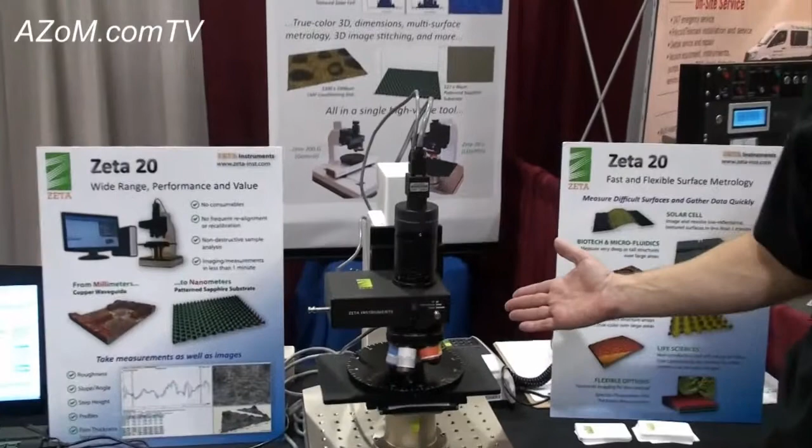Today I'm speaking to Ben Garland from Zeta Instruments, and he's going to tell us about their Zeta 20 optical profilometer. Great, thanks Cameron. This is our Zeta instrument. This is one of several series that we have. It's an optical profiler. Essentially it is a microscope system, but in addition to that it actually builds up 3D images so that we can measure X and Y dimensions. In addition to that, Z dimensions, so we can measure heights in terms of step heights, angles, and also roughness.

On the system we have an optical base plate in which one can put their own sample holder or stage. This is one of our standard stages, which is an XY manual stage with a rotation capability on the top. We have our standard objectives, which cover a range of 5x up to 100x. We have our technology that allows us to enhance the image and the resolution in the Z direction over that of a standard microscope system.

Our camera coupler combinations are very adjustable and user changeable to adjust to particular sampling needs by the customer. This is a mechanical drive in which we actually take image slices which are based on the full field of view of the current camera coupler to the sample. We use high brightness LED for illumination of the actual sample, so the color that we get back is the reflected light of the sample coming to the system, and then we take those slices in the Z direction to build up a 2D or infinite focus composite image, and then we have the 3D information.

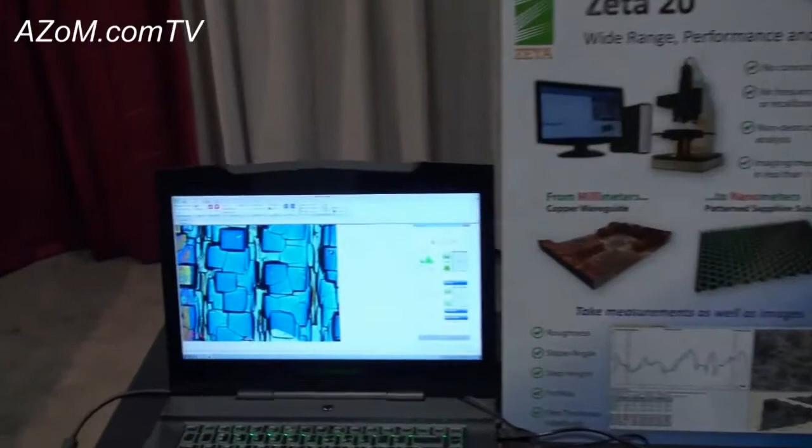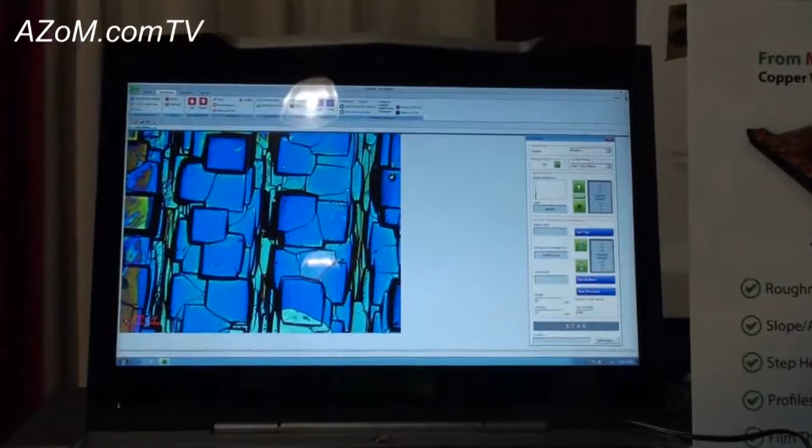To actually collect the data, it's very straightforward. If I walk over to the system, this is currently a semiconductor material, so this is silicon that's been etched. It has features, it also has some AR coatings and a variety of other films present. This is a nice sample to illustrate the technology. This is using different magnification lenses. One can actually see the effect in the field of view, but more importantly, the depth of focus. And that changes with the numerical aperture of the actual objective that's being used.

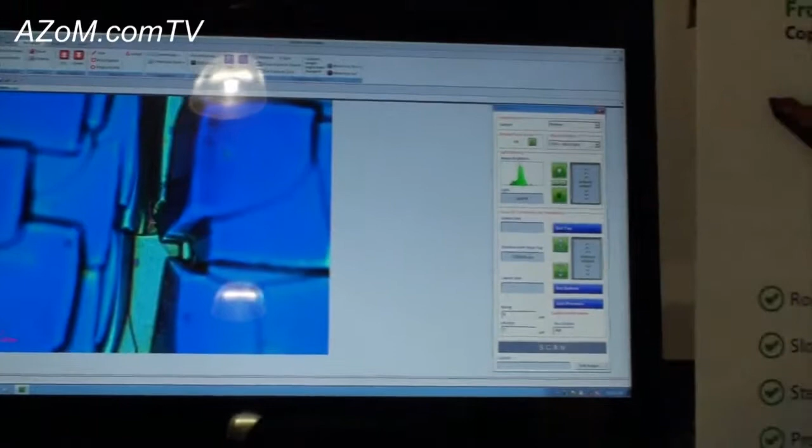If I go to even higher magnification, one can easily see, as I adjust the focus, there are many planes, or there's a huge depth of focus over the sample Z range. What I'm going to do is show you how we can collect this image in less than a minute and build up the 3D. Typically we adjust our illumination control, which is done here, or I can hit auto. The next step is to set the ranges, but what I'll do is actually turn on one of our proprietary capabilities which allows us to enhance this, and that is our focus assist.

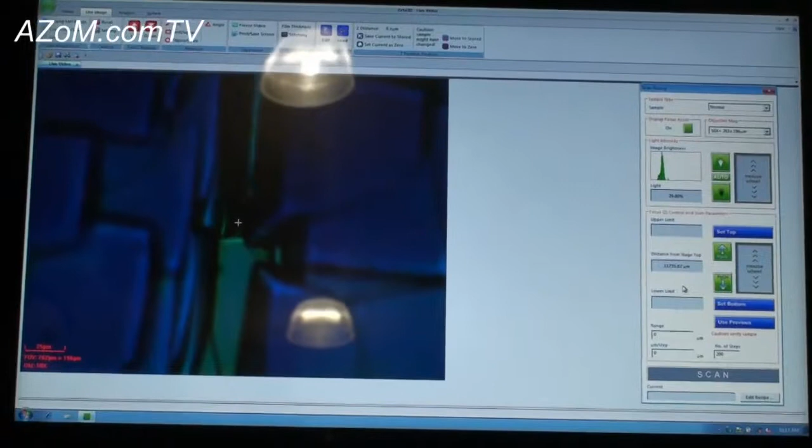It allows me to easily see which plane is in focus, so the region in the center is actually our highest point. To set the Z range, I want to scan from the top through the bottom, so I'll simply set top, and then I'll scan to the lowest point. Might actually give us a little more intensity for the contrast, and then scan to the lowest features, set bottom, maybe increase this a bit.

So we're going to scan a range of roughly 14 microns, and then based on the 200 slices that I currently have set, our resolution is going to be 70 nanometers per step. What I do is simply hit scan. At any point I can actually hit escape in the data collect if I really didn't want to run that particular spot.

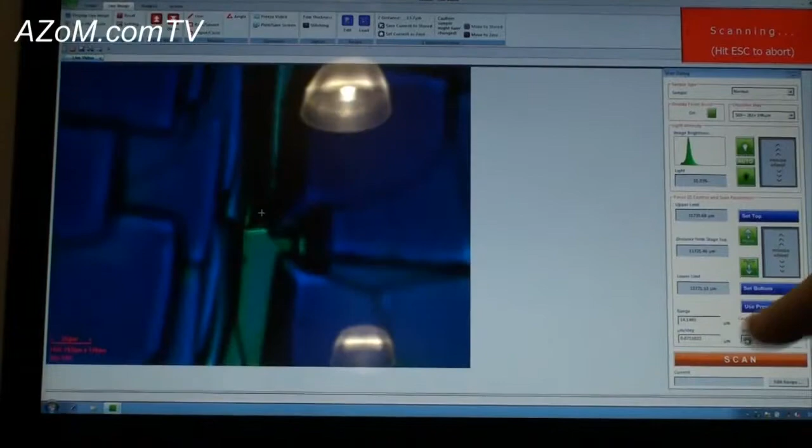You can actually see the image slice that we're taking on the sample. As we move the stage in the Z direction, we take that full field of view image at each location. At the end, we'll have the results, which will give me a profile across on the upper left. I'll have the 2D infinite focus image here, a 3D image located here, and the actual numeric values associated based on the cursors.

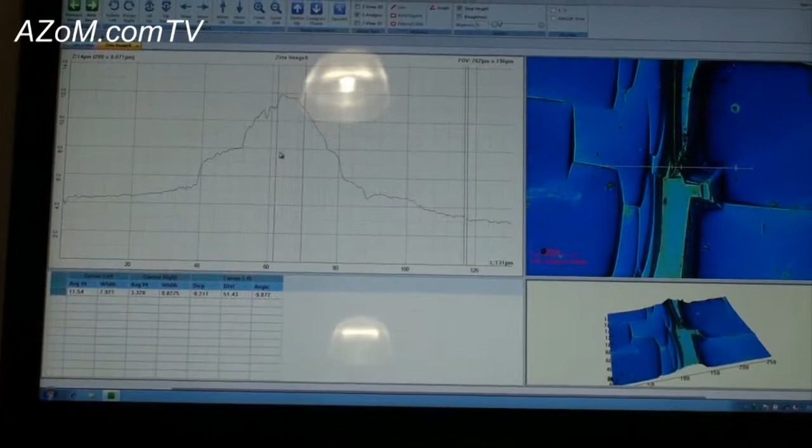Just like that, we have our image. I can now in the software very easily come over and measure steps. So for example, depending on where I put this particular cursor, I can look at step heights by taking averages or use markers and measure individuals. You can see on the 2D composite where I'm located on the actual image.

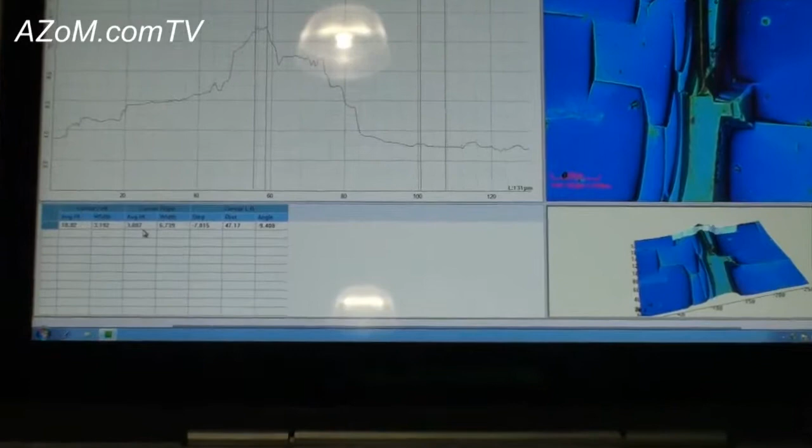So this cursor pair, average height from scan is 10 microns. The average height of the second cursor pair is at 3. Most importantly, if I wanted to know this particular feature, which can be any sample type, I would be measuring a step down, in this case minus 7.8 microns. So it's an optical profiler.

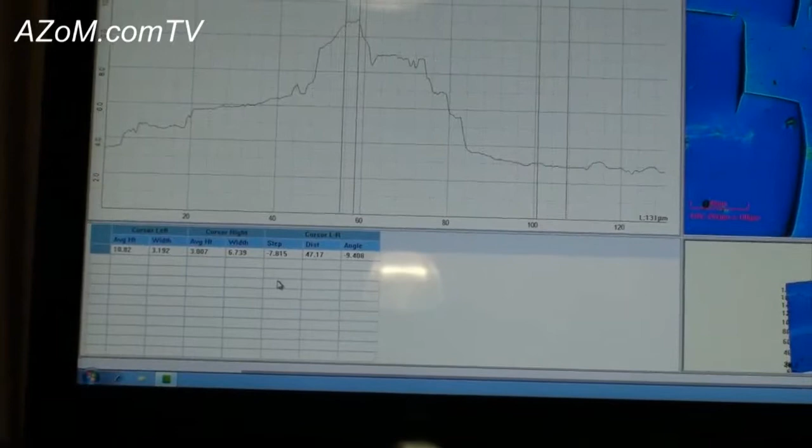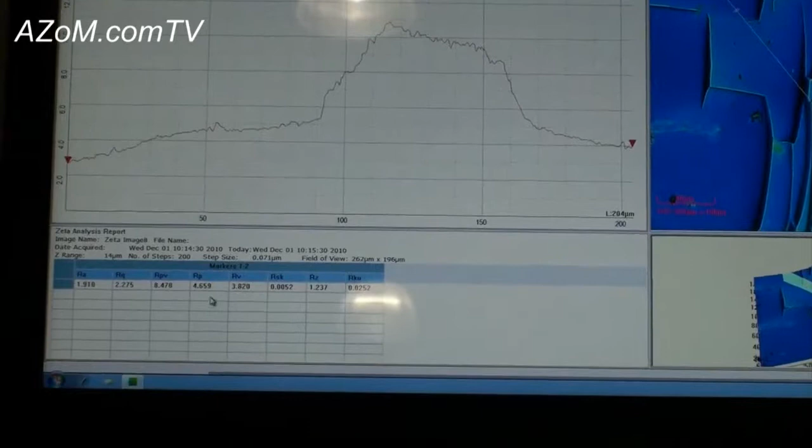I can move these cursors anywhere I want on the screen. I can make them oblique, move them across. I can have multiple cursors on the system. If this were a sample and I wanted to measure roughness, it's as simple as clicking roughness. Now I have roughness values such as your average roughness, the RMS, peak to valley, peak, valley, and then some of the statistical information about the shape and the distribution.

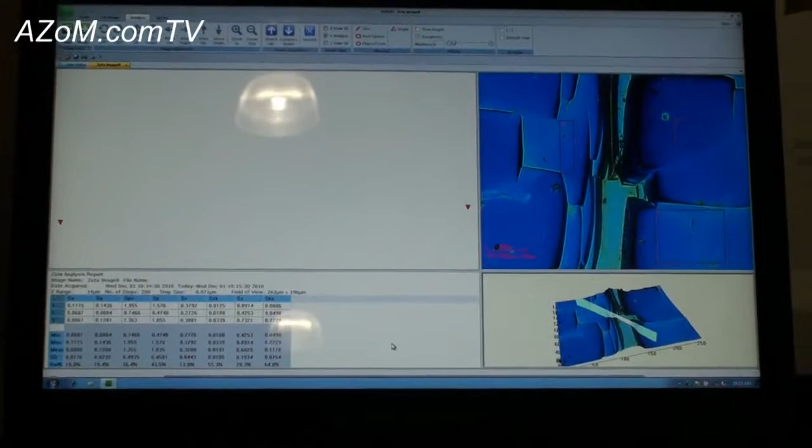Likewise, I can measure these as box step heights or box roughness. So for example, if I was interested in these particular regions, depending on where I put the boxes, I would have average values for everything contained within a box. The system lets you very easily collect the data, save the data, export the data out. So it's efficient in terms of its ease of use and operation.

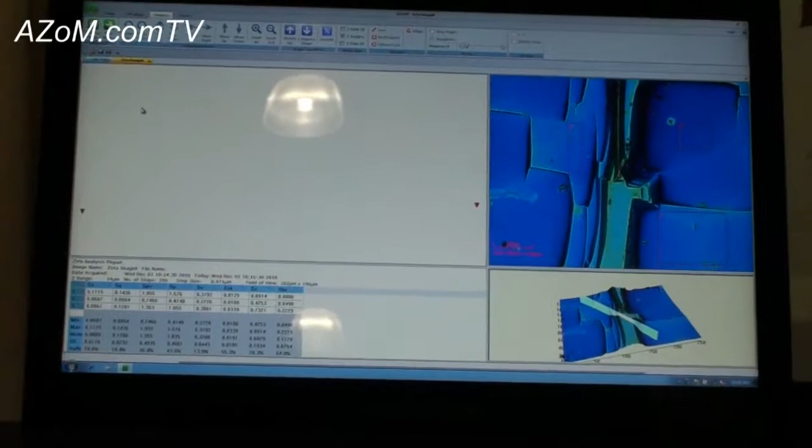All right, Ben, just out of interest, what sort of people typically use these sorts of instruments? Essentially, anyone that's trying to characterize a surface and measure the roughness, the texture properties. So solar industry, for example, if they're working with crystalline, looking at the pyramids, measuring the roughness as well as the AR coatings that are present, or the metal fingers.

Microfluidics, looking in transparent materials. We have the capability of looking at multi-layers, so I can look from a top layer down to a middle layer, all the way to a bottom layer in a transmissive type material and measure those heights. Across the board, there's a whole variety of applications. That's biological substrates, things like that?

Biologicals, we can look at the morphology as long as it's within the spatial resolution, which is about 0.4 microns for X and Y based on white light. If it's fluorescence, we are not in the fluorescence market. All right, and what's the maximum Z resolution that you have? We can step at 15 nanometers.